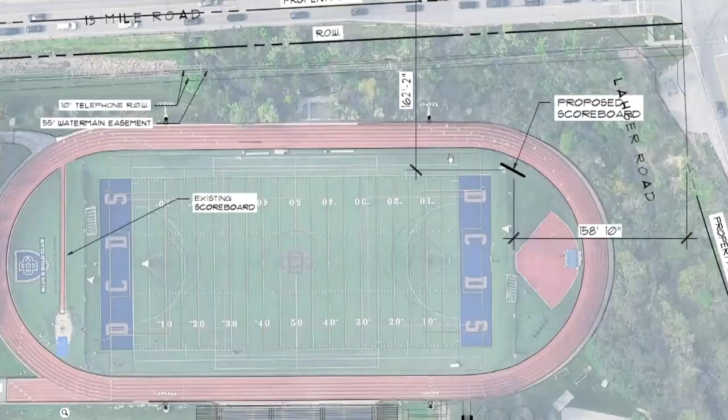The proposed scoreboard is, like I said, going to be in the northeast corner. It is approximately, let's see, can I work this part? It's approximately 162 feet from the center line of the road, and about 158 feet from the property line over on Lahser.

The results of their initial sound study did cause them to change their proposal. The original proposal had integrated speakers, and they are not going to do that any longer. They will be upgrading their existing speaker system. So that is no longer part of the consideration for Planning Commission this evening. I did provide you with the sound study because they did the sound study—it was a requirement. And really, we want to make sure that we're, one, being consistent, and two, being transparent and doing the things that we said we're going to do. And so here we are.

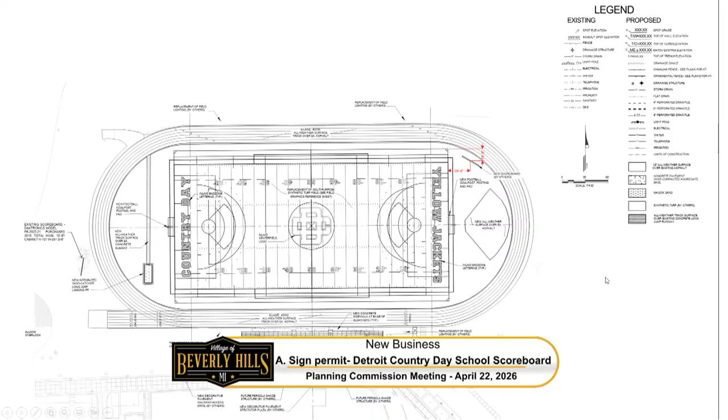Again, this is just a little bit more detail on the location. So just under 30 feet from the end zone, and about 15 feet in from the corner there.

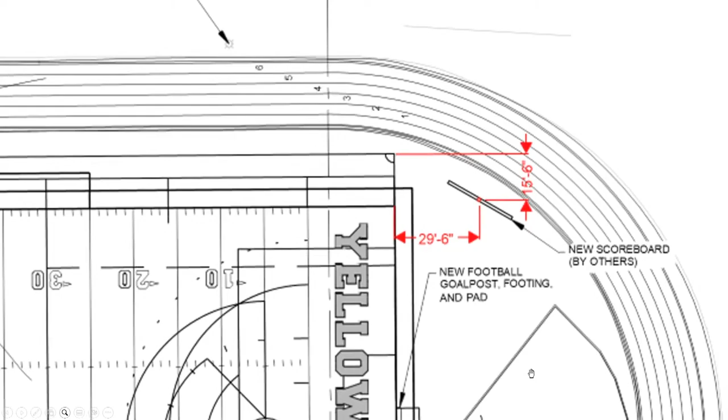Brian, anything I haven't covered yet that I should be covering? I think, Mr. Chair, for the commission's consideration, we did ask the petitioner to give us the information on the existing scoreboard, so you had a method of comparison. The existing scoreboard is 300 square feet in area and has a height of about 22 and a half feet.

So in comparison, this is bigger and it is taller. I think those are a couple of points we wanted to give you, something to have an apples to apples comparison in terms of what's there versus what's proposed.

Procedurally is the other big thing. The only reference in your ordinance to athletic field scoreboards is in the sign ordinance, and it's a strangely written regulation, to be honest. There's an exemption for athletic field scoreboards when they meet certain conditions. In this case, this proposal does not meet all of those conditions, which is why we've brought it before you, because the de facto idea is that it's not exempt. If it were exempt, they'd be fine if they met the standards. They don't meet the standards, therefore it's not exempt, therefore it's in front of commission.

However, we don't have any other standards to apply to give you additional review criteria. So similar to how we handled the sign package last month, myself, Susie, and Kristen, the village attorney, circled in on this. We felt this was another scenario that fit that catch-all, where a sign that's not defined has to come before Planning Commission to get approval before it can be installed. So we're following a similar path, that's what we're proposing.

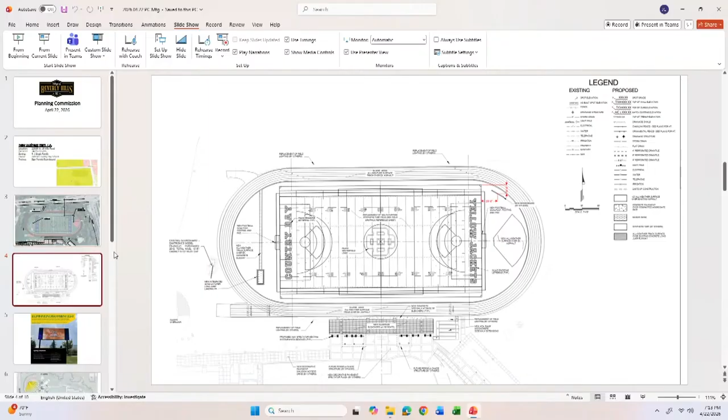Part of my review letter, toward the tail end of it, gets into the fact that the field sits quite a bit below the level of the roadways. So if you're looking at the front of the property, field level is several feet, about 13 to 14 feet below grade elevation of the road.

So a lot of that extra height is somewhat absorbed by the grade differential, but it will still sit roughly 17 feet above that grade elevation along 13 Mile. That was something we wanted you guys to have an understanding of what it might look like, what the impacts might be, keeping in mind it's a very heavily treed area in that northeast portion that I think will probably block the views of most of it.

There were some, did you get the photos in?

We had a number of photos that the petitioner provided, depicting that tree line, which, in my opinion, when those trees are in full bloom, will pretty much block out views of that scoreboard, at least the structure itself. I don't think you'll even see it.

What I was hoping we could get from the applicant was a rendering of sort of superimposing that scoreboard in there to get some ideas, but understanding that's a very difficult ask, so we didn't get that. But I do think that's something I want you guys to think about.

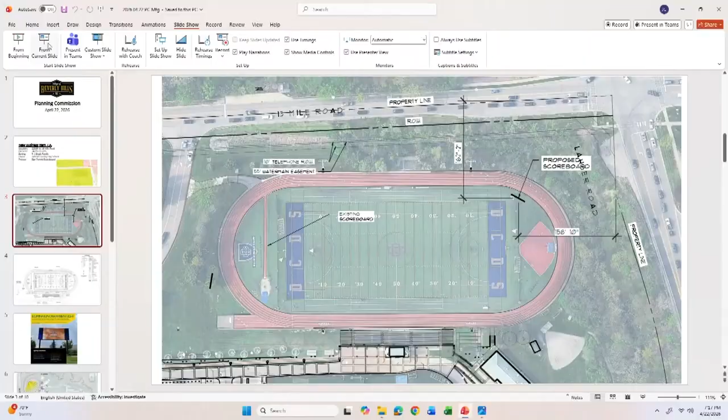Anything else, Scott? Nope, that's it. All right, I guess at this point I will bring it back to the table, unless you want to explain.

Scott wanted me to come in and answer any questions as well. My name is Chris Kern. I'm the owner and CEO at Digital Scoreboards. I've come in front of commissions like you more times than I can count around the country, so happy to answer any questions.

As you travel down 13 Mile, there will be essentially very little, if any, impact on traffic. The board has built-in illumination control, so as the sun sets in the community, the board dims itself automatically. In a night environment, if Detroit Country Day is playing a night game, the board will operate at about 4% of its total available brightness rating. The board does that automatically, and we also have remote controls to manage that from our network operating center.

In the event that the school needs us, or the photocell component isn't responding the way it should, they can call our network operating center and we can dim the board. The board will brighten as ambient light comes up, and dim as ambient light goes down.

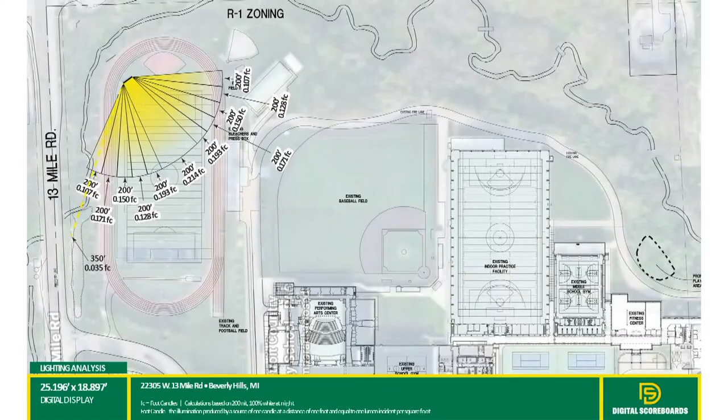Knowing how far the setback was, when Susie showed the measurements, there will be essentially no impact to 13 Mile Road, given how this board is angled. There's also a reason we did that aesthetically, working with landscape architects and the school, in how we turned the board to bring it back. The board has a 140-degree viewing angle, and we can even close that tighter to as little as 96 degrees. So as you're traveling down 13 Mile Road, the angle at which you'll be driving means you'll essentially be at less than that 140 degrees, so you'll have very, very little impact from that board.

I'm happy to answer any questions on the technology, the software, or the educational piece of the puzzle as well. Appreciate that, thank you.

Any others, before I bring it back to the table? I can bring it back to the table. Mr. Chair, do you mind if I ask a quick question? Oh, certainly. Chris, just a quick question for you too.

With respect, that viewing angle thing is very helpful, I appreciate that. Is that something that is fixed with the installation, or is this what they buy and this is what's installed, or can that be adjusted once it's already in place? Where I'm going with this, Commission, is if granted, understanding that the 140-degree viewing angle is theoretically not going to have an impact on traffic, but in practice it's approved and we find that it does have a little bit of an impact, is that something that can then be adjusted to reel it in to the point where it no longer has an impact?

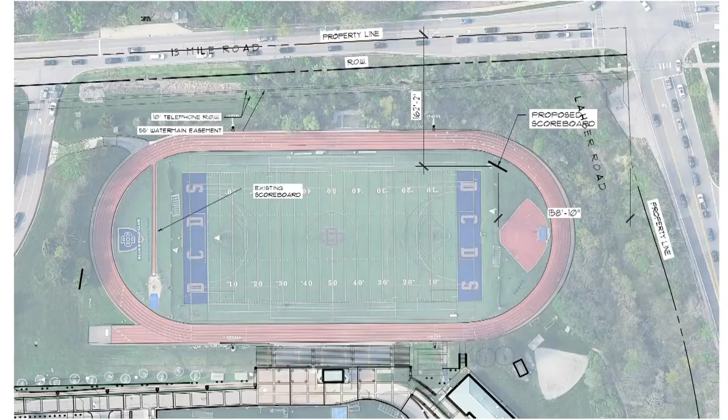That's going to depend at night. Correct, and that's all white light. You're never going to run this board at all white, ever, right? That's when an LED goes to full white, meaning it's burning at 100% of its intensity, but you can dial the brightness down. So it fires at 100%, but then you dim it down, giving it that dull hue, if you will.

Being that it's full color RGB, at night the board is going to fire at about 4% of its total brightness. So on the high side, you're probably at 300, but probably even lower than that when all the dust settles. During the daytime, it will produce less nits than sunlight, and at that point it just dulls into the rest of its surroundings.

That's the other thing I don't know if this takes into account in your calculations, but the field's going to be illuminated, correct? At the same time, because we have new light fixtures going on the poles that will illuminate the field. So we're looking at one piece of information, the light from the scoreboard, but I do believe there's a slide in this presentation that gives a comparison between light standards and the video board.

Thank you, that's perfect. So this board will produce substantially less light bleed than light standards, even with, are you guys putting in Musco lights or R3 or Acuity?

Okay, Qualite. So as they put in Qualite lights, which is a dark skies product, right? So this board will produce less ambient light into the playing facility than the actual light standards that they're putting in. Both foot candles will be much greater with the light standards, as is the ambient light. So the light bleed from the light standards around the field will be substantially higher than the video board itself.

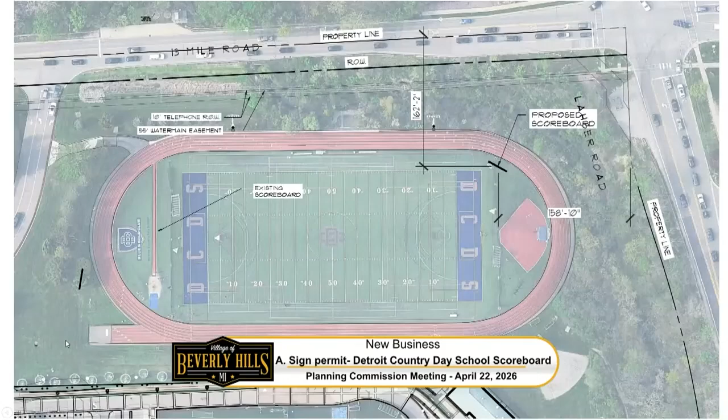Yeah, so the intent is the scoreboard would be clearly visible to those folks, correct? And that's probably 600 feet away from it, that'd be fair to say? Probably 425. Well, if it's way down there and you're showing an arc that barely hits the 50-yard line at 200 feet, so 500 feet maybe, I don't know. But the point is...

Anybody within that 140-degree angle that is 500 feet away is going to see the giant TV in the sky, right? Yeah, they're going to see it, but of course, it would be no different than if it was a traditional scoreboard. Right, because the way they'll be using it is just like a regular scoreboard.

Right, well the thing is, it's not like light spillover, it's a big screen, right? I don't know, I'd probably prefer it if the angle was such that it would not ever see 13 Mile Road, and in the same thought process that it would never actually see Lahser. I think there's enough building and structure there that the people living behind would probably be relatively shielded.